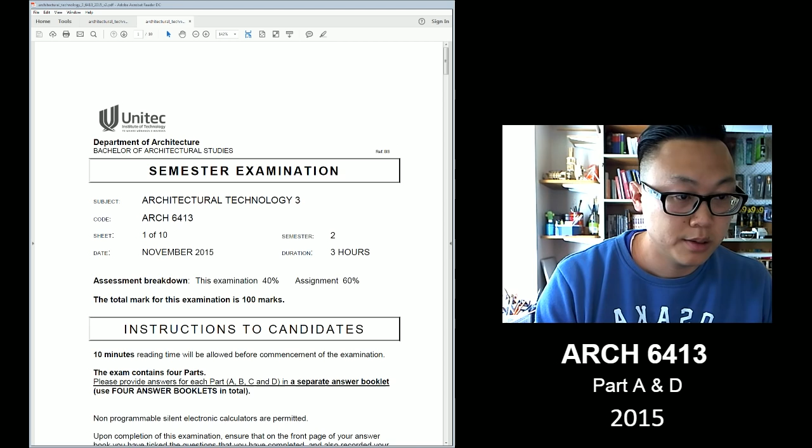Okay, just gonna put it again. Oh, actually that was the wrong link. Like you guys, fast, huh? I didn't even show the question yet. So I think we're just gonna go quickly through all of them, and if I see there's like a 50-50, we can talk about it.

Okay, question 1: Aluminum foil insulation. Time to vote, and make sure that everybody votes, huh? I can see how many of you voted. So I don't know who, but I know the numbers. I'm just gonna wait like 30 seconds or so, just to make sure everyone can vote.

And I'm just gonna tell you what's the percentage, and then after that you can just mark, okay, which one is the most. Maybe I should get a timer. Two seconds. Let's say 30 seconds, I think that should be enough for everybody to vote.

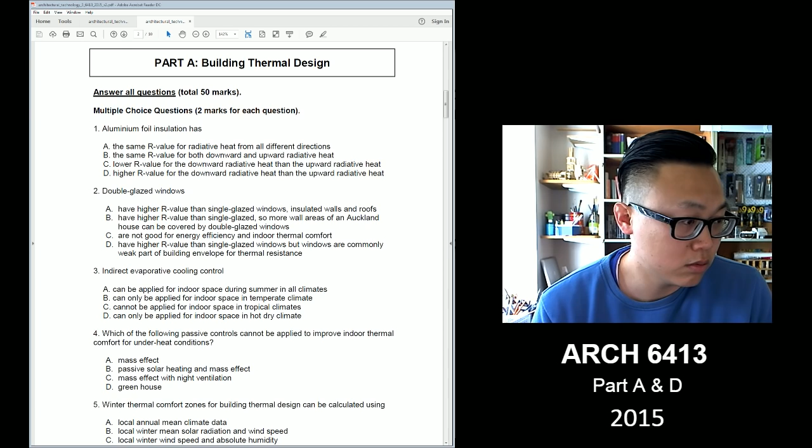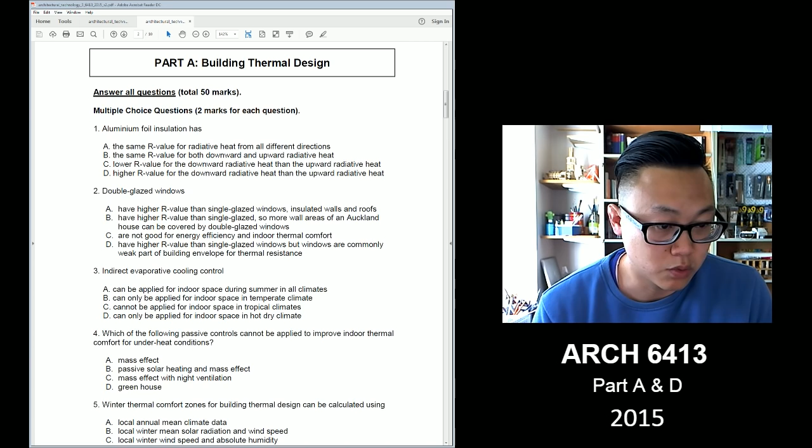Okay, next question. Oops, doesn't work. Come on. Okay, next question. Which of the following passive control?

Okay, so for this one, most people selected C, mass effect with night ventilation, which I think is correct. I voted C as well, because when it's under heat, that just means it's cold, and night ventilation is used to cool the structure, and we don't want that. We want to keep the place as warm as possible. So yeah, I think the answer is C. Next question.

Okay, well, right now everybody just said it's answer D, which I think is correct - local winter monthly mean climate data. Because, yeah, it just says winter thermal zone, so I guess it will be winter here. Next question.

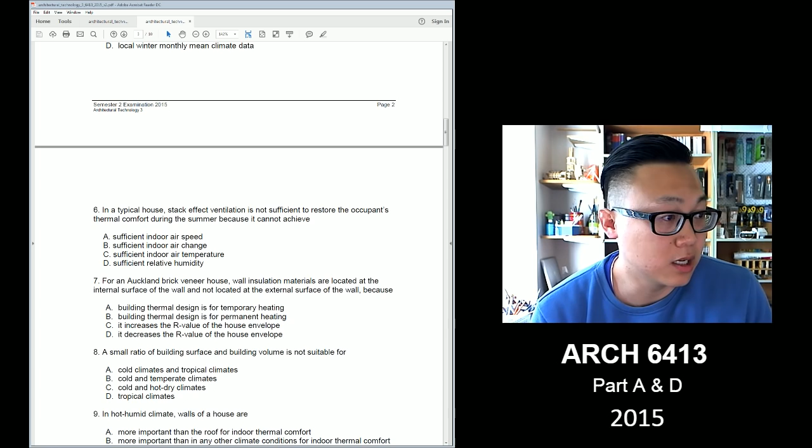For an Auckland brick veneer house, wall insulation materials are located at the internal surface of the wall and not located at the external surface, because...

Okay, for this one, there's a 50-50 between answer A, building thermal design is for temporary heating, and C, it increases the R value for the house envelope. My answer was C. I don't know how we can discuss, because now I think there's 7 people who say A, 5 say B, and 8 who say C. So well, I'm not sure which one is right, but maybe that's a question where you can look into your notes and just check to confirm that your answer is correct. But...

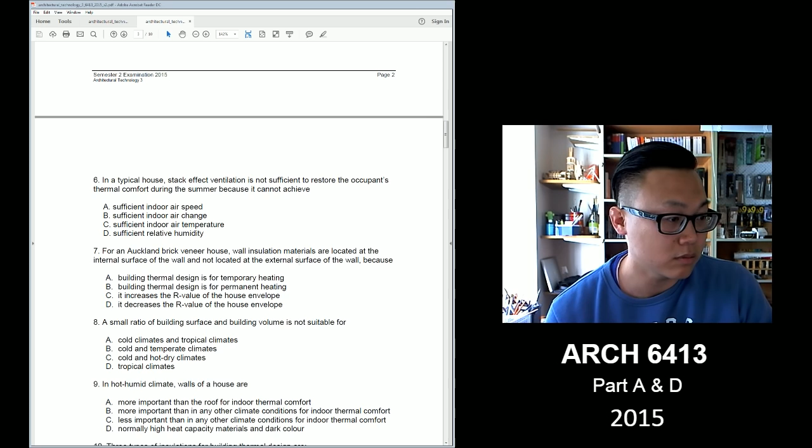Small ratio of building surface and building volume is not suitable for...

Okay, well, for this one, there's unanimous agreement. It's answer D, tropical climate, because in a tropical climate you want to really extend the plan to get more ventilation. So yep, answer D. Next question.

In a hot, humid climate, walls of a house are...

Okay, for this one, most people, like 90%, voted for C - less important than any other climate condition for indoor thermal comfort. Because yeah, in hot, humid climates, what you want is a lot of natural ventilation, so you have a house with a lot of windows. For hot, humid, usually the most important is the roof, to get the shading from the sun. Okay, now question 10.

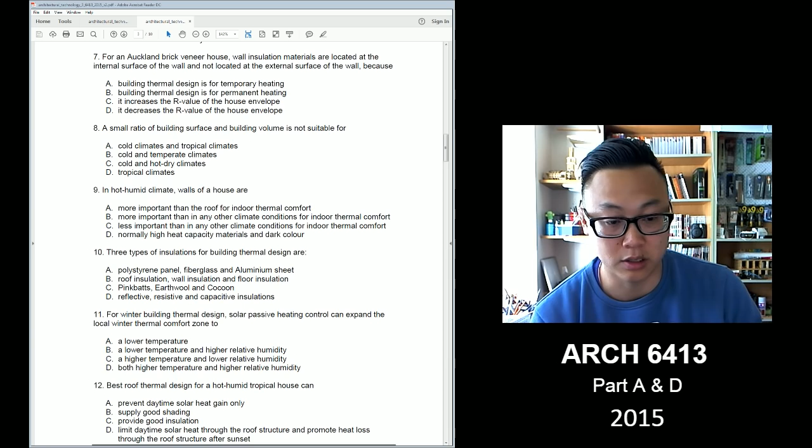Okay, for this one, most people, like 100%, selected answer D, reflective, resistive, and capacitive insulation. Next question.

I need to take note as well. Where is it? Where's my thing?

Okay, so for this one, most people have answered C, higher temperature and lower relative humidity. My personal answer was A.

My reasoning was that in winter, what you want is to have a comfortable, warm environment, even if it goes to a lower temperature. So if it's usually 8 to 12, that's like the normal comfort zone. But then I want to add solar passive heating so that it stays warm even if it's going down to 2 degrees. That was my reasoning - to expand the local winter thermal comfort to a lower zone, because I don't think it's required to get it up to a higher temperature because it's winter. What you want is to get it warmer. But yeah, that's my answer.

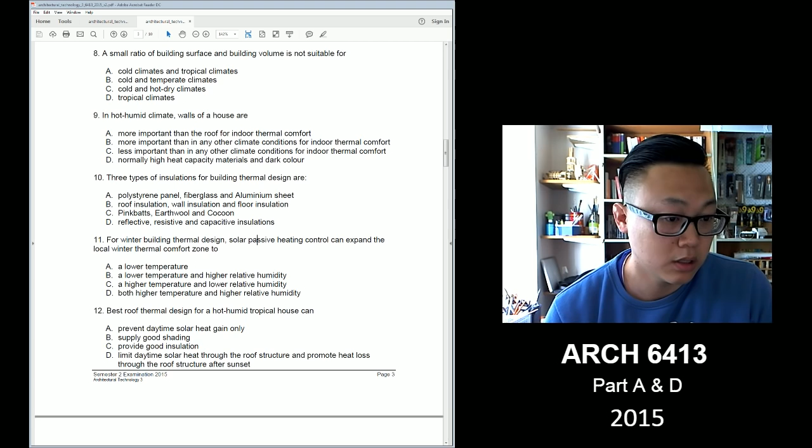Best roof thermal design for hot humid climate.

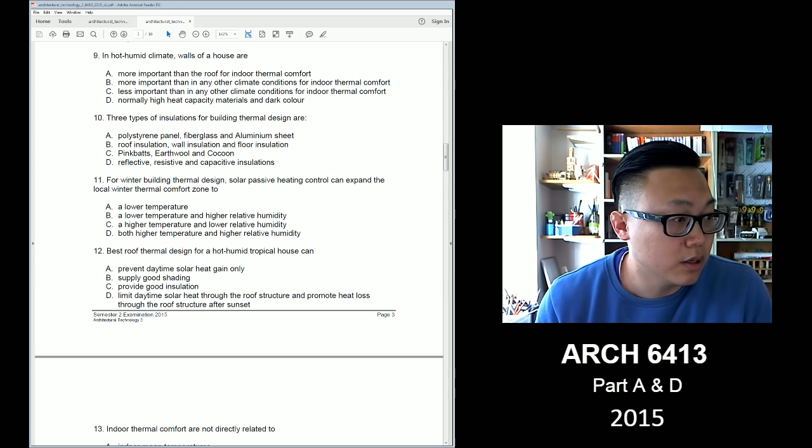Indoor thermal comfort are not directly related to... this is question 13. For this one, 45% voted for D, indoor absolute humidity. 5 people voted for A. I voted for D, indoor absolute humidity, because I think all the other options will actually affect the interior temperature. But that's my answer.

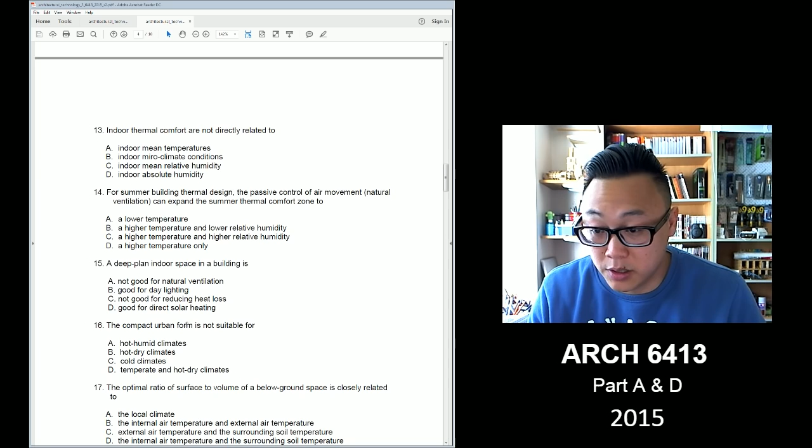When you read those type of questions, make sure you read them correctly, and this one is not suitable. Most people answered A, hot humid climate, which I think is right. Some of you answered B, hot dry climate. Actually, the compact urban form is usually suitable for hot dry climates, because you want the buildings close together so they create some shading for each other. So in this case, because of the 'not suitable', the answer is A.

Okay, next question. The optimal ratio of surface to volume of a below ground space is closely related to... for this question, I couldn't really find the answer in the notes. I don't think they were talking about any below ground stuff.

Okay, so for this one, I think 16 people voted. 7 people said B, internal air temperature and external air temperature. 5 selected C, and 4 selected D.

My answer was D, internal air temperature and surrounding soil temperature. I think it's either C or D, because if it's talking about below ground space, the soil temperature is important. And because usually when we study this it's to control the indoor temperature, not the exterior one, that's why I said interior air temperature and soil temperature. So my answer was D. But like I said, 7 people chose B and 5 chose C.

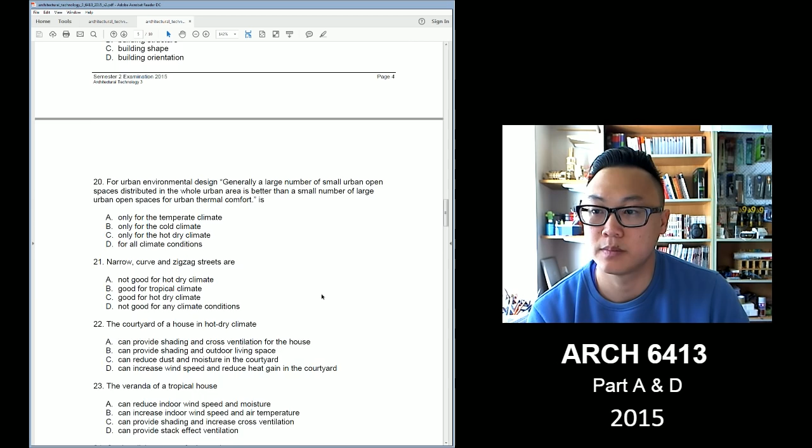Okay, next question. So it's about parks. Is it better to have small ones or big ones?

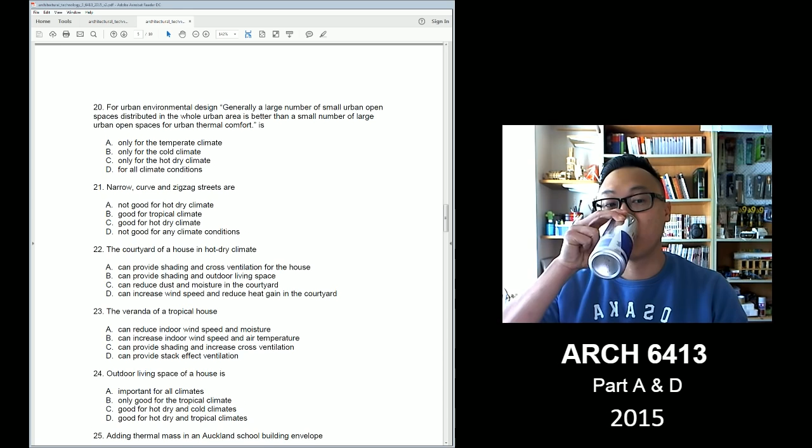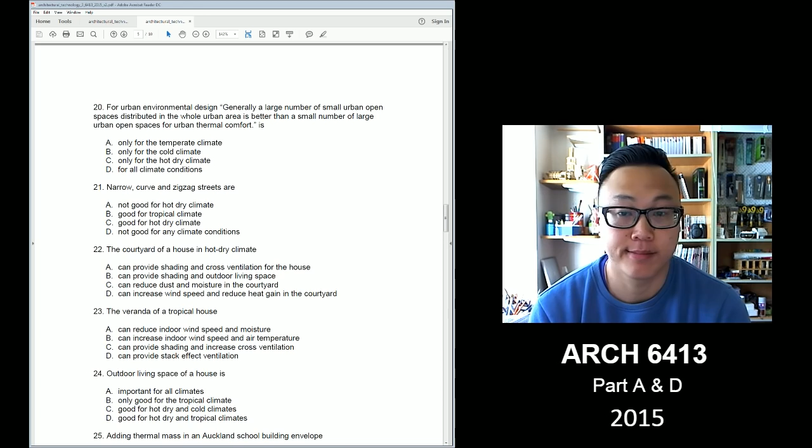Okay, we have a winner. I think on this one, most people selected D, for all climate condition. And I think it's in the lecture, Ben talked about this. They were saying that if the park is too big, it might just get overheated. So it's always better to just have small ones. So it's D. Next question.

Narrow, curve, and zigzag streets are...

I got a close competition now. So it's between C and D. 8 people chose D, not good for any climate condition. 7 people chose C, good for hot, dry climate. I'd choose C. Like I said earlier, for hot, dry climate it's better to get buildings close to each other, a really compact urban fabric, so you can have shading. And there's the diagram about the wind, so you could trap the air between the buildings and have the really strong wind going on top of the roof. That's why I choose narrow, curvy streets. But for this one, 7 people chose C and 8 chose D. I think it's in the notes, so you should have a look at it to be sure.

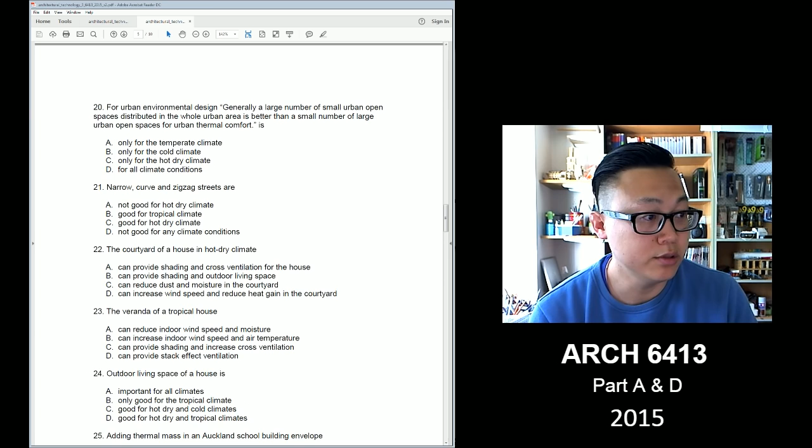Next question. Outdoor living space of a house is...

Okay, so for this one, the majority of people chose D, good for hot, dry, and tropical climate. A few people took important for all climate. My answer was D. I don't think it's important for all, because you don't need an outdoor living space in cold climate, it's too cold, too windy. I think people would stay inside rather than go outside. But it's important for hot, dry, and tropical, because that's when it's hot, so you just want to get some fresh air. So for this one, 13 people chose D and 5 people chose A. But I think it's D.

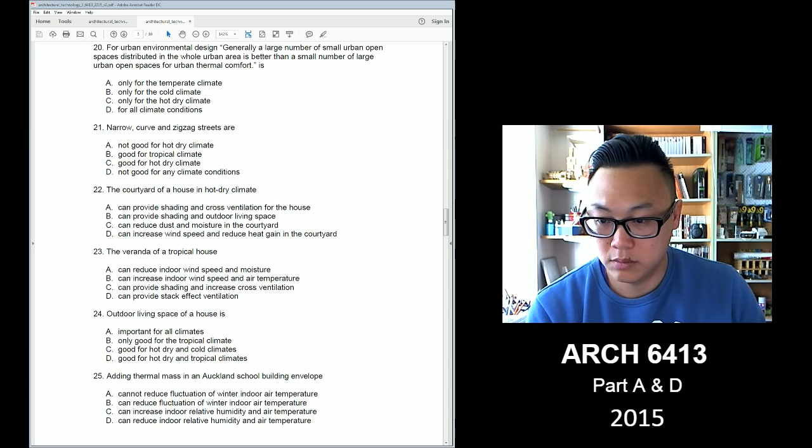Next question. Votes.

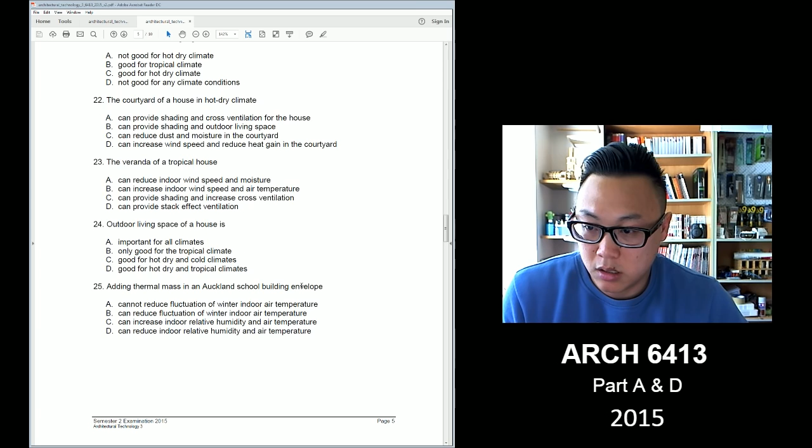Okay, so for this one, most people selected B, can reduce fluctuation of winter indoor air temperature, which I think is right. Yeah, 17 of us selected B.

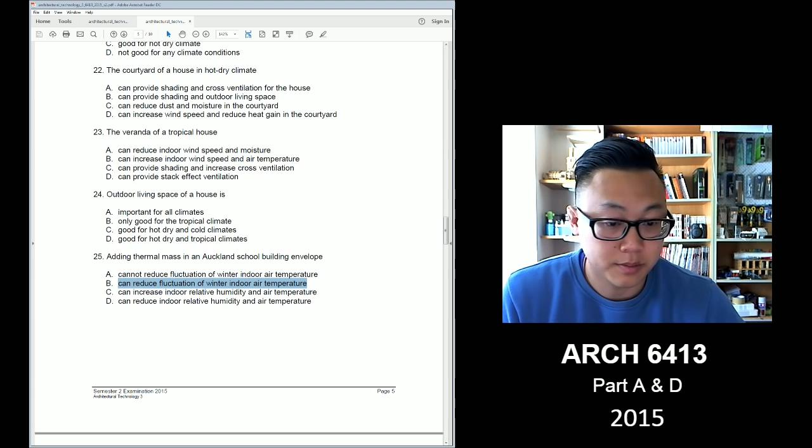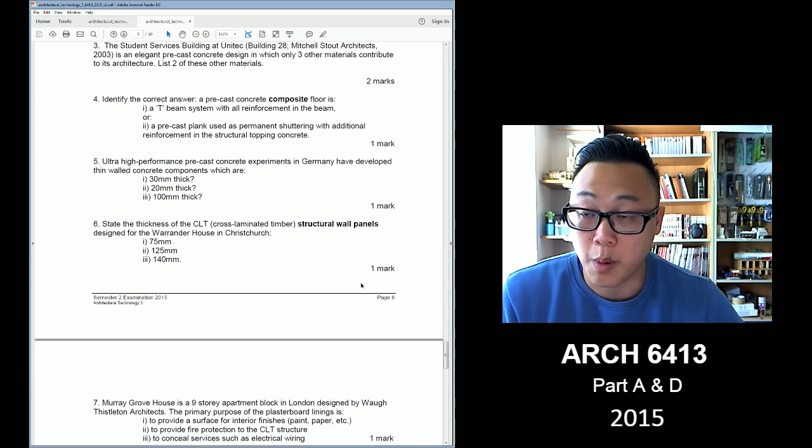Next. Okay, so we finished part A. Now I'm gonna skip to part D, because I think lighting and acoustic, it's more about memorizing all the definitions and remembering the name of the different halls and examples. So I'm just gonna skip to part D.

So precast concrete composite floor is, yeah, so I switched the 1 for 2. Actually on this one there's no number 3.

Okay, so for this one, most people selected answer 2, precast plank used as permanent shuttering. Actually, I don't even know because I haven't really looked at that lecture yet, but I initially selected 1, and it seems that I'm wrong. A lot of people choose number 2, and I don't think that many people will be wrong. So yeah, most people choose number 2.

Next question. Ultra performance concrete. What did I answer for this one? I choose.

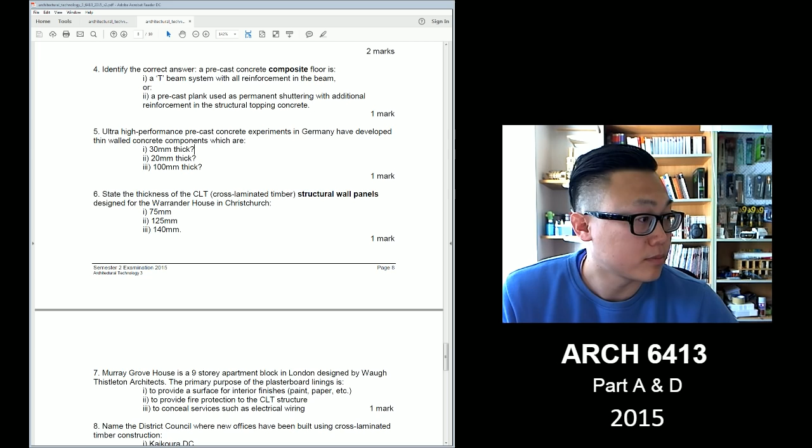Ooh, yeah, this one I didn't know, so hopefully I can find an answer from you guys. Okay, still voting.

Okay, so for this one, most people, 11 of us, have selected answer 2, to provide fire protection to the CLT structure. 6 of us have selected number 1. That one actually I'm not sure which one is right or wrong. Initially I put 1, but then it might be for the fire protection, so that's something we need to check. Okay, but yeah, most people took number 2 for this one. Next question.

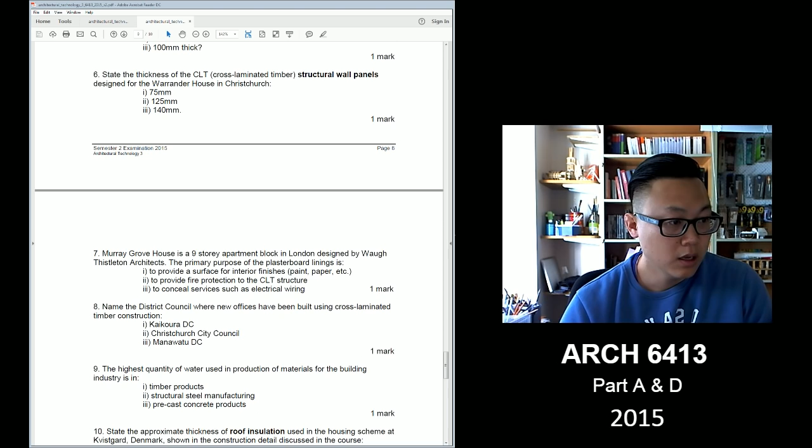The highest quantity of water used in production of materials is - not really sure on this one too.

Yeah, just like I said before, this is just to know what other people think is the right answer. Until we get marked, we don't know which one is which. So it's just about finding where there might be uncertainty, and then you can have a look in the notes for yourself.

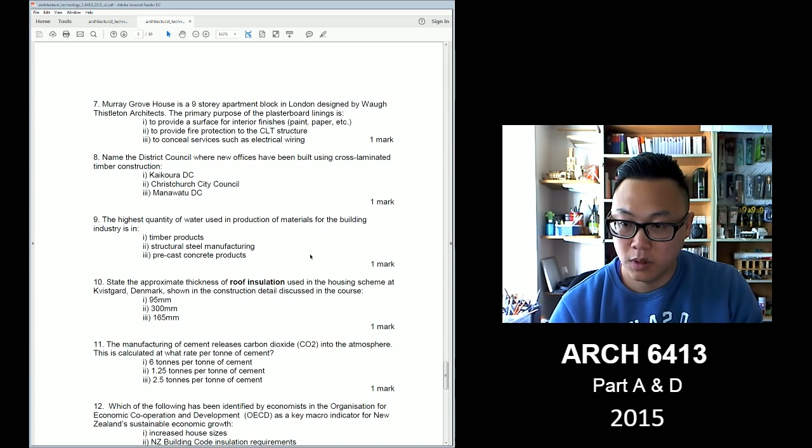Okay, so for this question, most people answer number 2, 300 mil, which I think is correct. Number 2, 300. Next question.

The manufacturing of cement releases carbon dioxide. I think there was no...

Okay, everybody selected number 2, 1.25, and yeah, I think it's correct. That should be in the notes. So yeah, number 2. Next.

Which of the following has been identified by economists? Okay.

Okay, so for this one, most people, 15 of us, have chosen number 3, oil consumption, and I think it's right as well. Next question.

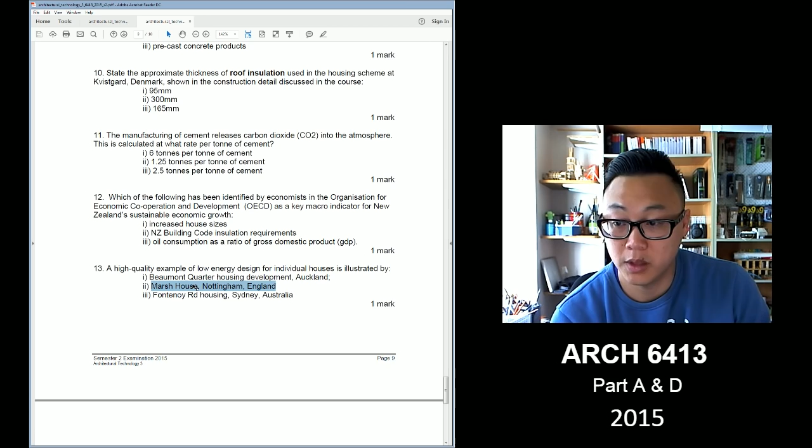Okay, so for this one, most of us, 12, have selected number 2, Marsh House. And I think that was the example that was in the notes, because I think the Beaumont Quarter was more for the townhouses, like terrace housing, so it's for high density buildings. So I think in this case, it's for Marsh House, an individual house. So yeah, number 2. Okay, next question.

Housing designers refer to which of the following as the first variable for housing? Cool, that's a question I wanted the answer to. I wasn't sure.

Next question. Common design mistake. Yeah, that's it. I think for this one there's an image in the note. He didn't write anything, but I think he showed the image and talked about it.

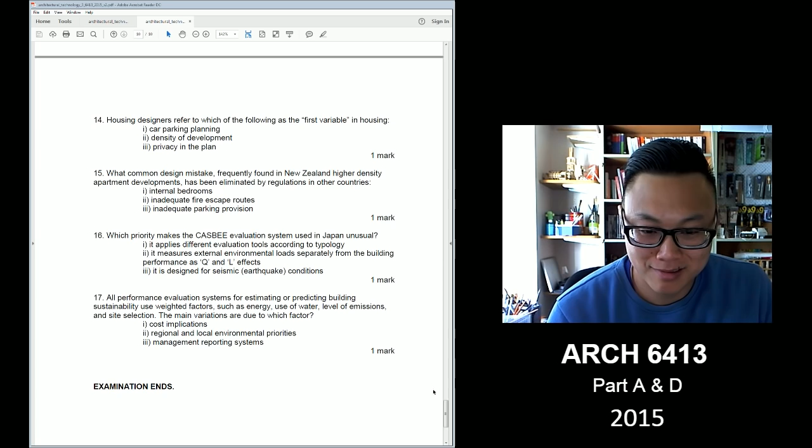Yep, I'm just gonna stay live a little bit more. What time is the exam? I think it started at 9, no? 9 o'clock. But yeah, just come early, huh? And don't forget your ID.

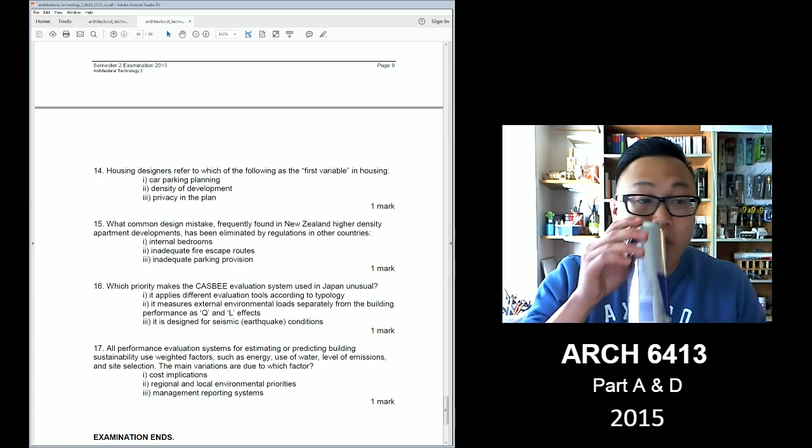So who would be keen to do the 2014? I think they're about the same questions, it's just the way he asks is a bit different. But yeah, I mean it doesn't really take long to do this. It took us like maybe an hour.

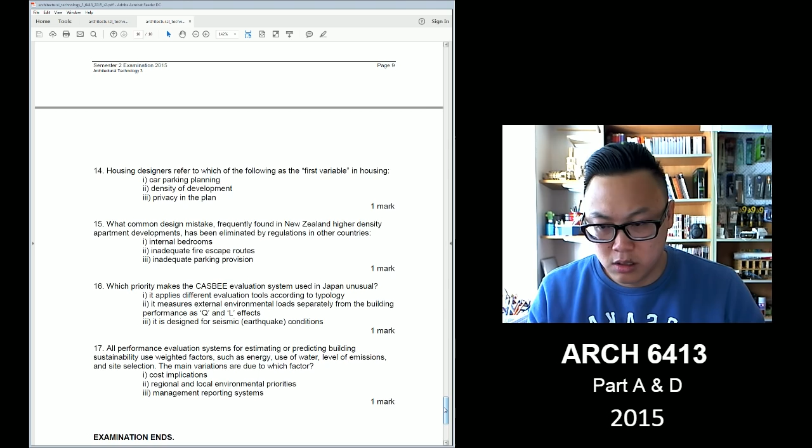What are the two materials in the student services building? Is it on this one? Is it 2014? But I think the answer for that question was steel and timber.

But yeah, maybe tonight. Wait. Maybe after 9, I'm going out for dinner first.

Yeah, but Twitter, I think in that question when he asked, he already talked about concrete and then he asked what's the other two materials. So that's why you say steel and timber.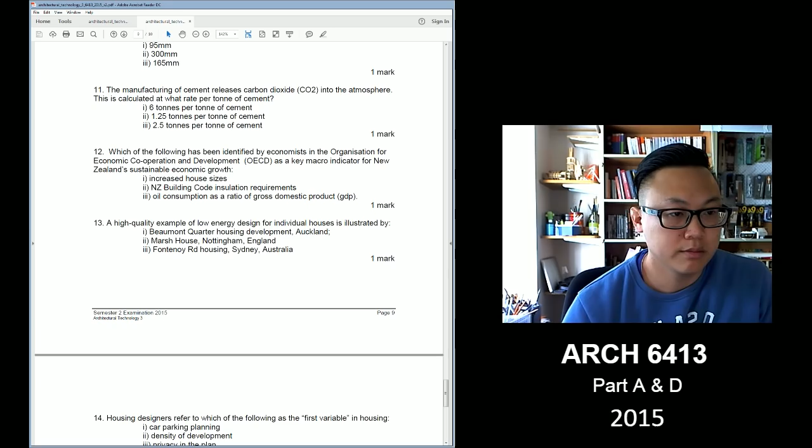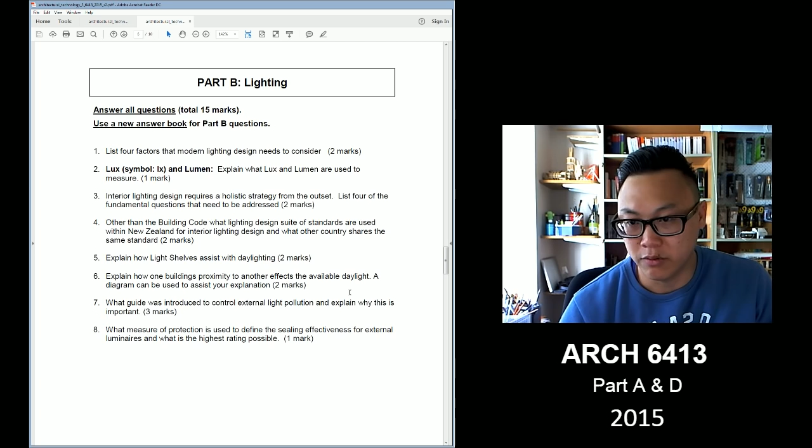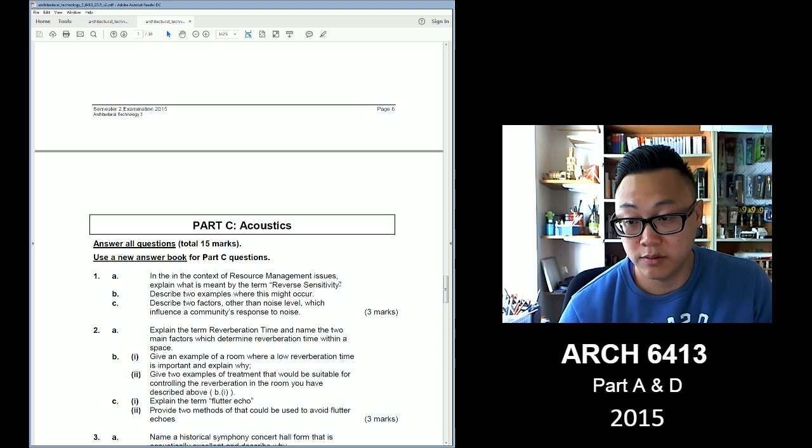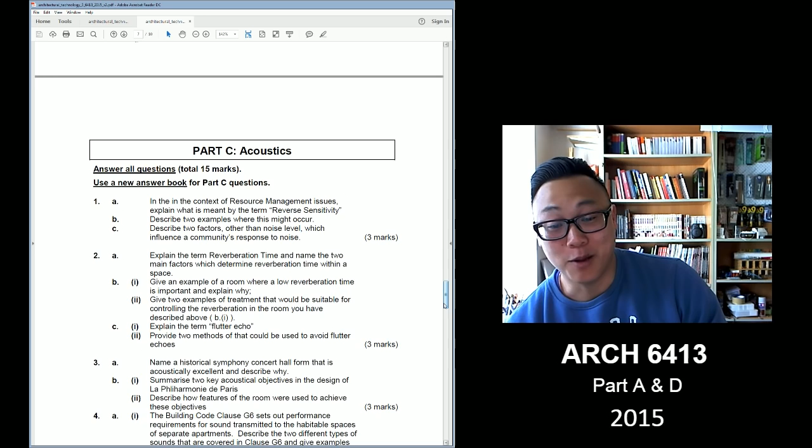Are you guys all good with the light and acoustics? Because I didn't go over this one, I had to write stuff, and usually for this one most of it is covered in the notes. There's maybe some stuff missing like reverse sensitivity. I think you can Google that and get an answer. But yeah, maybe later tonight we can quickly go over those ones. Because like I said, I'm not sure about my answer. So I don't want you to just trust me like this. Because I might be wrong, so it's just yeah.

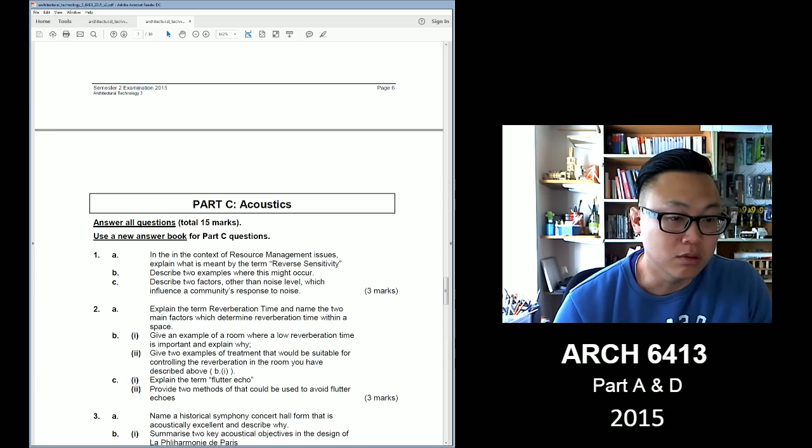What did you guys get for question 2? Question 2, the double glazing? I think we chose number D. Letter D.

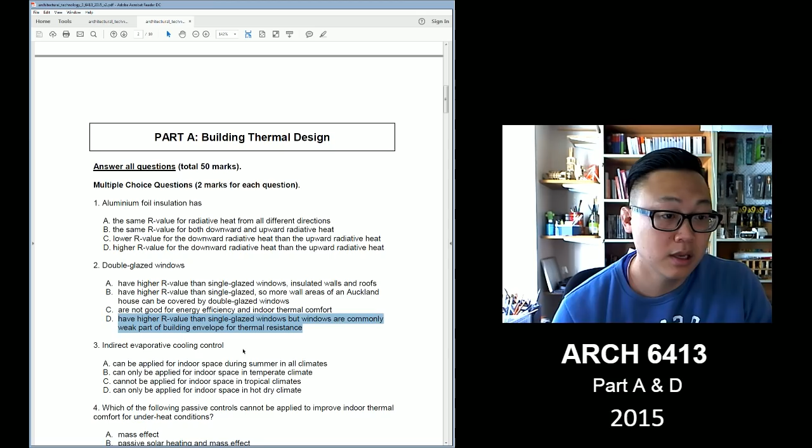Precast concrete. I think for this one I said durability and cost efficiency, I think, that's what I put. Yeah, low maintenance cost and high thermal mass, that's what I put.

Yeah, that's the thing, it's really hard to get an answer with that type of setup. I can't, not everybody would type what they answer. So, but yep, oh, that's it.

Nothing else. Who would be keen for tonight? Maybe after 9 o'clock. Or maybe it can be a bit later this afternoon, maybe 5, because I just want to go over my part B and C myself first.

Yeah, because right now I think there were 23 people, but I think the more people coming in and doing the voting, it'd be better for everybody. Okay, cool, everybody's keen. Yep.